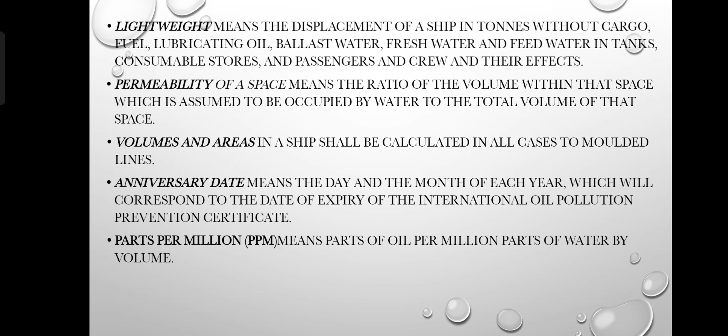Parts per million, ppm, means parts of oil per million parts of water by volume.

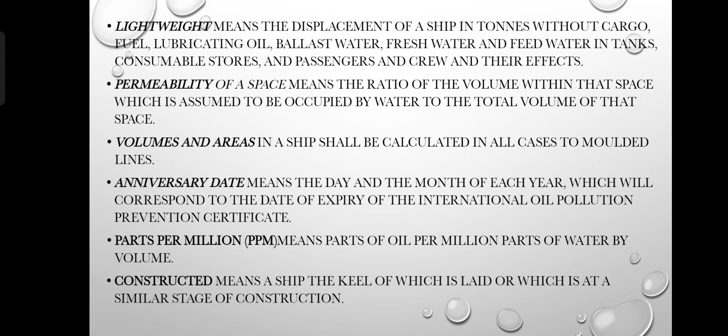Constructed means a ship whose keel is laid, or which is at a similar stage of construction.

Regulation: Application. Unless expressly provided otherwise, the provisions of this Annex shall apply to all ships.

In ships other than oil tankers fitted with cargo spaces which are constructed and utilized to carry oil in bulk of an aggregate capacity of 200 cubic meters or more, where such cargo is not subject to the provisions of Annex II of the present Convention, it shall be carried in the cargo spaces of an oil tanker.

Regulation 3: Exceptions and waivers. Any ship such as a hydrofoil, air cushion vehicle, near-surface craft, and submarine craft, etc., whose constructional features are such that the application of any provision of Chapter 3 and Chapter 4 of this Annex relating to construction and equipment would be unreasonable or impractical, may be exempted by the administration from such provisions, provided that the construction and equipment of that ship provides equal protection against pollution by oil, having regard to the service for which it is intended.

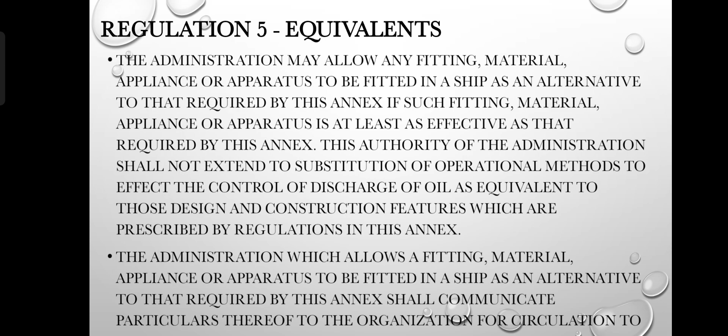The administration which allows a fitting, material, appliance, or apparatus to be fitted in a ship as an alternative to that required by this Annex shall communicate particulars thereof to the Organization for circulation.

Regulation 6: Surveys. Every oil tanker of 150 gross tonnage and above, and every other ship of 400 gross tonnage and above, shall be subject to the surveys specified below.

An initial survey, a renewal survey, an intermediate survey, an annual survey, and an additional survey.

Ensure that the necessary surveys are complied with. Enforcement of surveys by the administration or nominated surveyors. Nominated surveyors are responsible for the competence of the inspected ship. The condition of the ship shall be maintained to comply with the requirements throughout its service.

Regulation 7: Issue or endorsement of certificate. An International Oil Pollution Prevention Certificate shall be issued after an initial or renewal survey in accordance with the provisions of Regulation 6 of this annex to any oil tanker of 150 gross tonnage and above, and any other ship of 400 gross tonnage and above, which is engaged in voyages to ports or offshore terminals under the jurisdiction of other parties to the present convention. The certificate shall be issued or endorsed as appropriate either by the administration or by persons or organizations duly authorized by it.

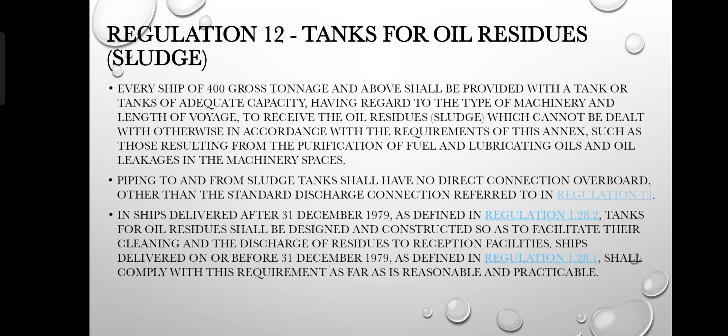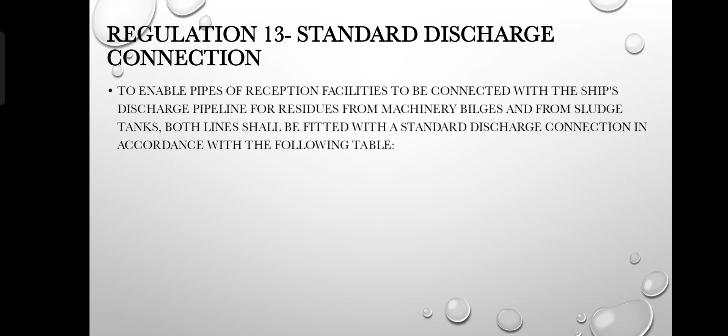Regulation 13: Standard Discharge Connection. To enable pipes of reception facilities to be connected with the ship's pipeline for discharging residues from machinery bilges and from sludge tanks, both lines shall be fitted with a standard discharge connection in accordance with the following table.

Standard dimensions of flange for discharge connection. Outside diameter: 215 millimeters. Inner diameter according to pipe outside diameter. Bolt circle diameter: 183 millimeters. Slots in flange: 6 holes, 22 millimeters in diameter, equidistantly placed on the bolt circle of the above diameter, slotted to the flange periphery. The slot width is to be 22 millimeters. Flange thickness: 20 millimeters. Bolts and nuts: quantity 6, diameter 20 millimeters each, of suitable length.

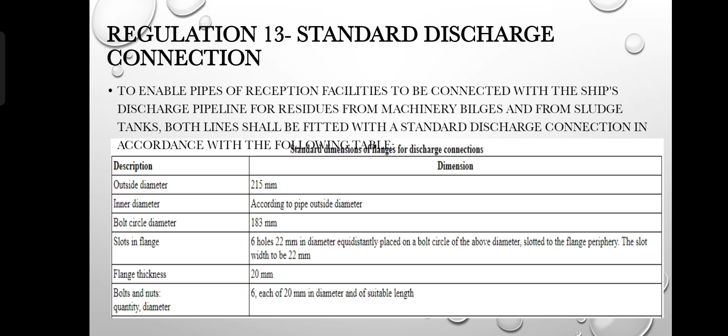Regulation 14, Oil filtering equipment. All ships of 400 GT and above—such as hotel ships or stationary storage vessels—may not have oil filtering equipment provided that they have a holding tank and discharge to a reception facility.

Ships less than 400 GT may discharge under conditions set by the regulation of the convention. All filtering equipment must be type approved by the administration at the 15 ppm rule, and all oil filtering equipment must be equipped with an alarm.

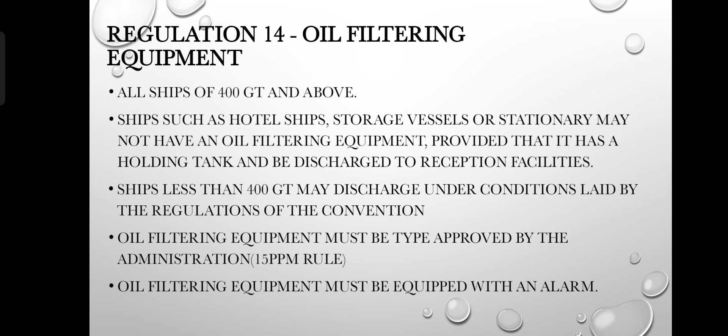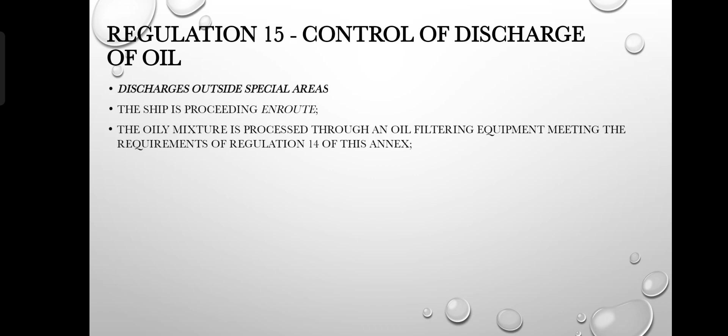Regulation 15, Control of discharge of oil, discharge outside special areas. The ship is proceeding en route, and the oily mixture passes through oil filtering equipment meeting the requirements of Regulation 14 of this Annex. The oil content of the effluent without dilution does not exceed 15 parts per million.

Oil filtering equipment must be equipped with an alarm. The oily mixture does not originate from cargo pump room bilges on an oil tanker, and the oily mixture on an oil tanker is not mixed with oil cargo residue. Discharge in special areas shall comply with the regulations stated above.

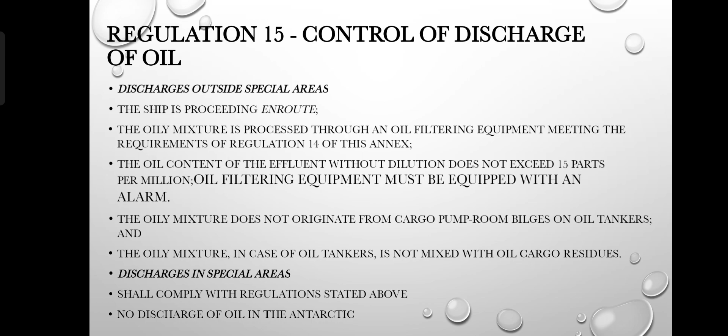Regulation 16, Segregation of oil and water ballast and carriage of oil in the fore peak tank. For ships delivered after 31 December 1979, no ballast tank shall be carried in the fuel tank. If there is a need to carry large quantities of fuel, it shall be stored in a ballast tank; it shall be discharged and stored in the ballast tank.

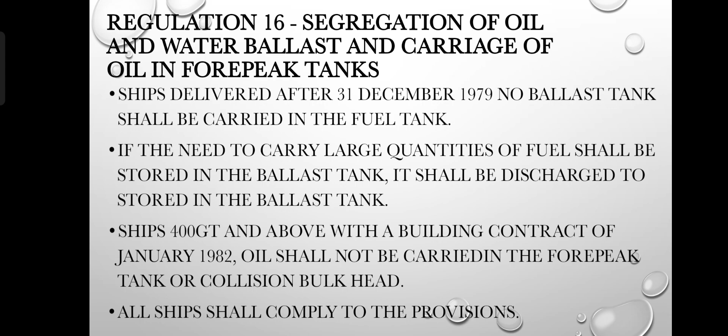Ships of 400 GT and above with a building contract from January 1982 shall not carry the fore peak tank or fuel oil in the collision bulkhead area. All ships shall comply with this provision.

Regulation 17, Oil Record Book, Part 1, Machinery Space Operations. Every oil tanker of 150 gross tons and above, and every ship of 400 tons and above, shall be fitted with an oil record book that is completed on each occasion. Entries shall be made under operation number 1.

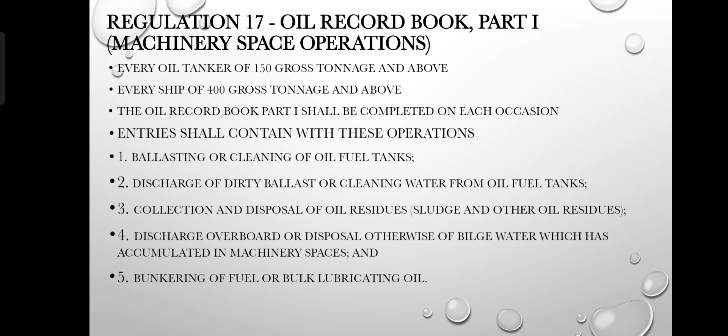1. Ballasting or cleaning of oil fuel tanks. 2. Discharge of dirty ballast or cleaning water from oil fuel tanks. 3. Collection and disposal of oil residues, sludge, and other residues. 4. Discharge overboard or disposal otherwise of bilge water which has accumulated in the machinery space. 5. Bunkering of fuel or bulk lubricating oil.

The regulation on segregated ballast tanks concerns the construction of product and crude oil tankers with segregated ballast tanks: qualification of a tanker to have a segregated ballast tank, protection of the segregated ballast tank, and the capacity of the segregated tank shall be determined so that the ship may operate safely on a ballast voyage without recourse to...

...the use of cargo tanks for water ballast, except as provided for in paragraph 3. Use of cargo tanks for water ballast, except per the provisions of paragraph 3 or 4 of this regulation, in all cases. However, the capacity of the segregated ballast tank shall be at least such that, in any ballast condition at any part of the voyage—including the condition consisting of lightweight plus segregated ballast only—the ship's draft and trim are satisfactory.

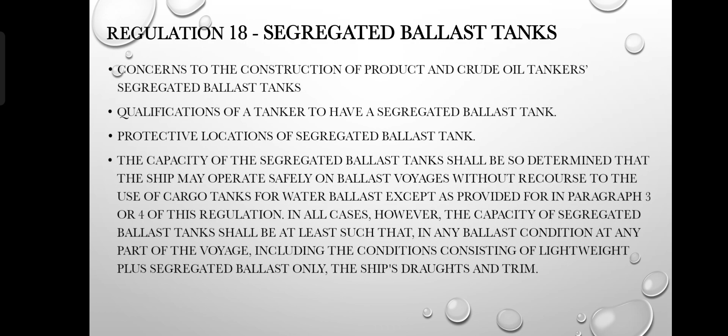Regulation 19-20, Double hull and double bottom requirements apply to all tankers of 600 deadweight and above delivered on or after 6 July 1996.

It also applies to all tankers of 600 deadweight and above delivered upon completion of design and construction with a double hull provision, constraining compliance to the regulation.

Purpose of the double hull and double bottom. The purpose of the double hull is to reduce the probability of oil outflow following a collision or grounding.

Regulation 21, Prevention of oil pollution from oil tankers carrying heavy grade oil as cargo. Applies to all tankers of 600 tons deadweight and above carrying heavy grade oil as cargo, regulated based on the date of delivery.

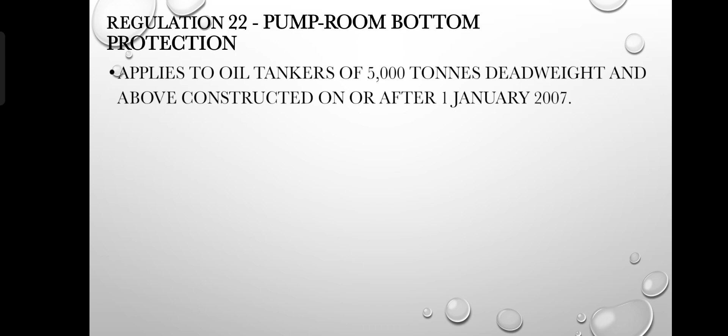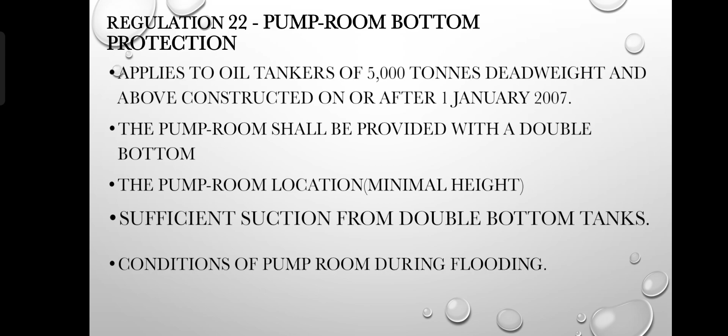The pump room shall be provided with a double bottom. The pump room location minimal height sufficient for suction from double bottom tanks. Condition of the pump room during flooding.

Regulation 23, Accidental oil outflow performance, applies to all tankers delivered on or after 1 January 2010. Protection against oil pollution in the event of collision or stranding.

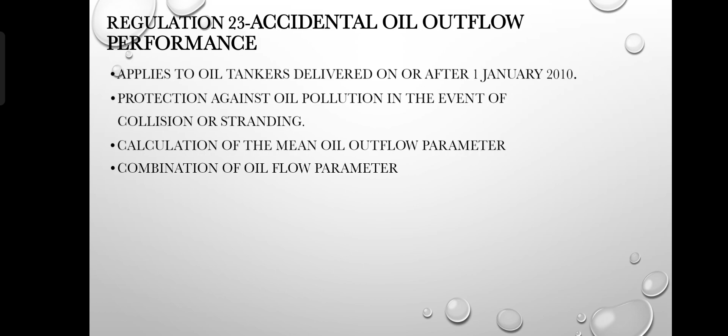Calculation of the mean oil outflow parameter. Combination of oil flow parameters.

Mean outflow for side damage. Mean outflow for bottom damage. Probability of breaching a compartment.

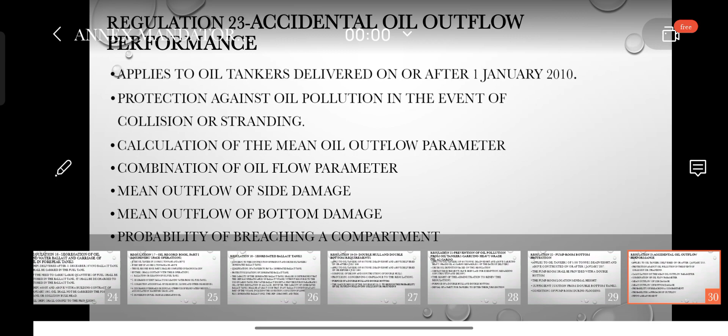Probabilistic approach of outflow, the piping arrangement.

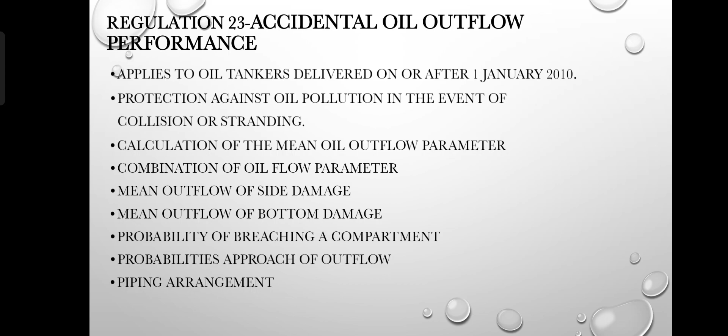Regulation 24, Damage assumption—calculating hypothetical oil outflow from an oil tanker and the assumption of damage that may occur.

Regulation 25, Hypothetical outflow of oil. Calculation of the outflow of oil in case of damage, calculated based on the volume of a defined tank.

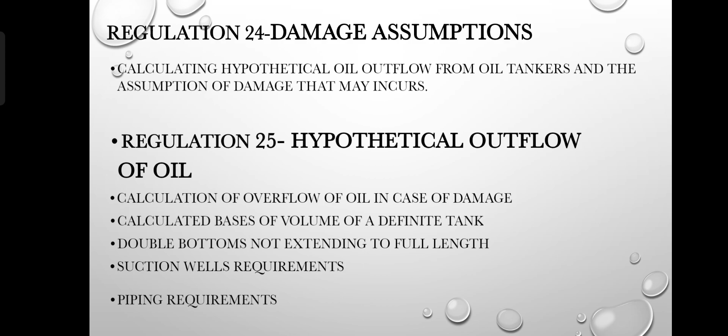Double bottom not extended to full length. Suction wells requirements, piping requirements.

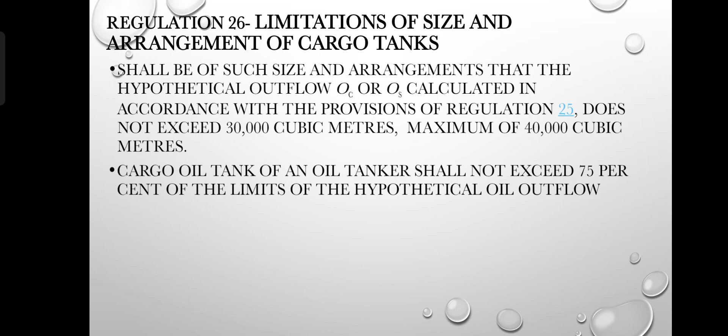Regulation on limitation of size and arrangement of cargo tanks: cargo tanks shall be of such size and arrangement that the hypothetical outflow, OC or OS, calculated in accordance with the provisions of Regulation 25, does not exceed 30,000 cubic meters or 40,000 cubic meters. Cargo oil tanks of an oil tanker shall not exceed 75% of the limits of the hypothetical outflow.